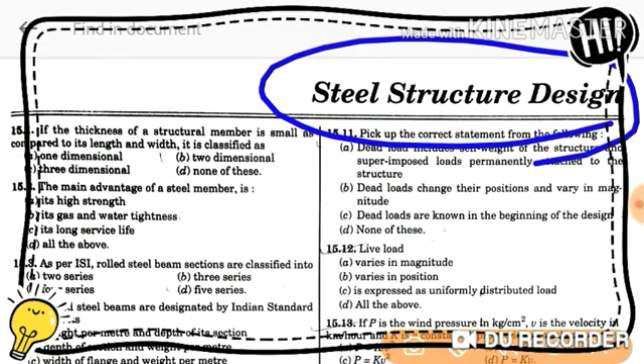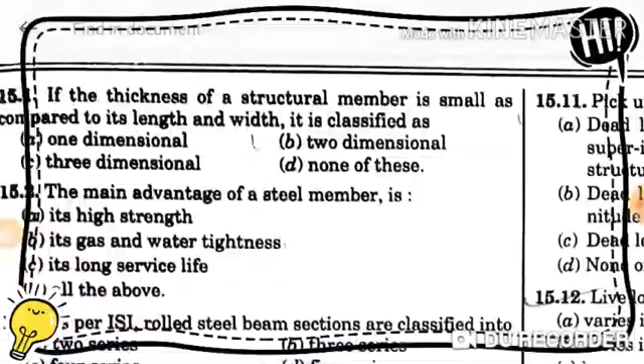First question: If the thickness of a structural member is small as compared to its length and width, it is classified as option A 1 dimensional, option B 2 dimensional, option C 3 dimensional, option D none of these. Option B is the right answer, 2 dimensional.

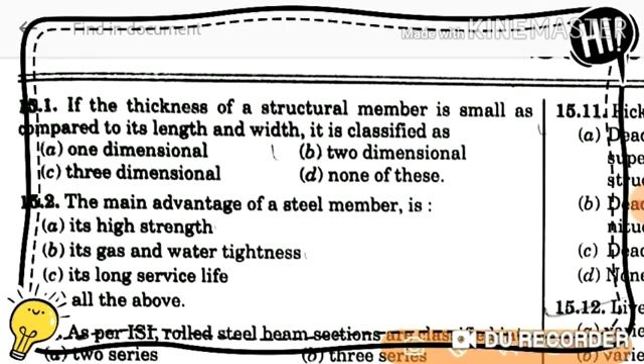Next question: The main advantage of a steel member is option A its high strength, option B its gas and water tightness, option C its long service life, option D all of the above. So D will be the right option.

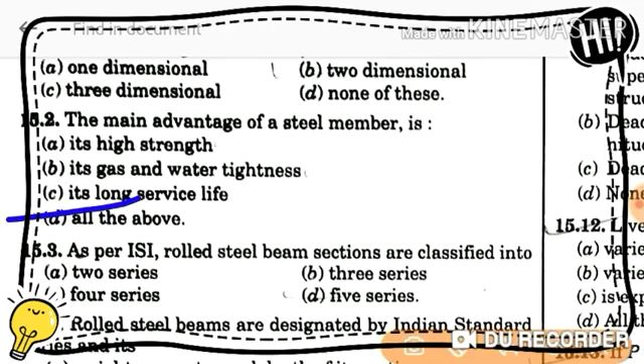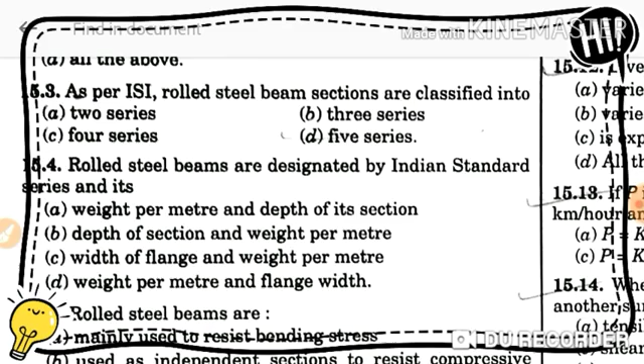Next question: As per ISI, rolled steel beam sections are classified into option A 2 series, option B 3 series, option C 4 series, option D 5 series. So option D will be the right option, 5 series.

Next question: Rolled steel beams are designated by Indian Standard Series as option A weight per meter and depth of section, option B depth of section and weight per meter, option C width of flange and weight per meter, option D weight per meter and flange width. So option B will be the right option, depth of section and weight per meter.

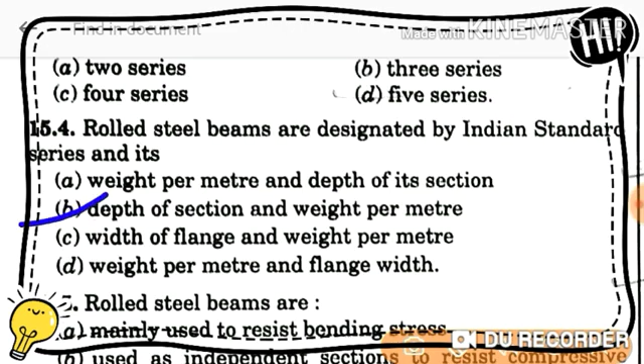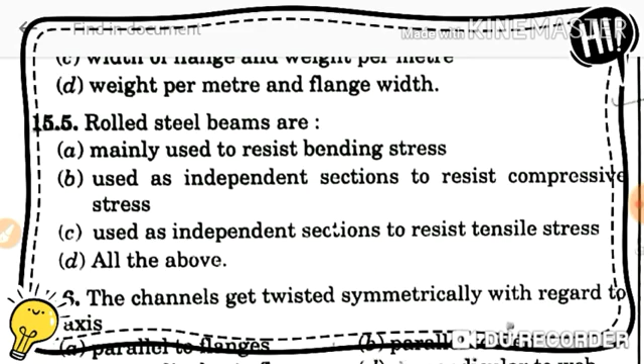Next question: Rolled steel beams are option A mainly used to resist bending stress, option B used as independent section to resist compressive stress, option C used as independent section to resist tensile stress, option D all of the above. So D will be the right option, all of the above.

Next question: The channel gets twisted symmetrically with regard to its axis - option A parallel to flange, option B parallel to web, option C perpendicular to flange, option D perpendicular to web. So option B will be the right option, parallel to web.

Next question: Rolled steel T sections are used as option A columns, option B with flat strips to connect plates in a steel rectangular tank, option C as built up section to resist axial tension, option D none of these. So B will be the right option, with flat strip to connect plate in a steel rectangular tank.

Next question: Rolled steel angle sections are classified as option A equal angles, option B unequal angles, option C bulb angles, option D all of the above. So D will be the right option, all of the above.

Next question: Bulb angles are used for option A column building, option B base building, option C ship building, option D water tank building. So C will be the right option, ship building.

Next question: With percentage increase of carbon in steel, it decreases its option A strength, option B hardness, option C brittleness, option D ductility. So D will be the right option, ductility - it decreases.

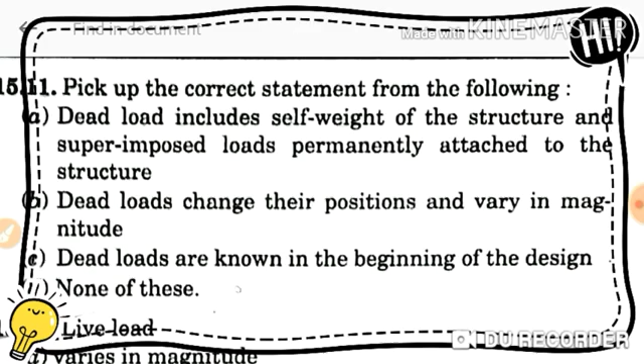Next question: Pick up the correct statement from the following. Option A dead load includes self weight of the structures and superimposed loads permanently attached to the structure. Option B dead load changes their position and varies in magnitude. Option C dead loads are known in the beginning of the design. Option D none of these. So which one is correct? Option A will be the right option - dead load includes self weight of the structures and superimposed loads permanently attached to the structure.

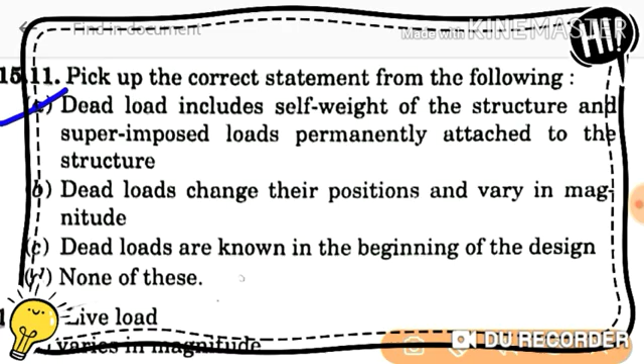Next question: Live load varies in magnitude - option B varies in position, option C it is expressed as uniformly distributed load, option D all of the above. So D will be the right option, all of the above.

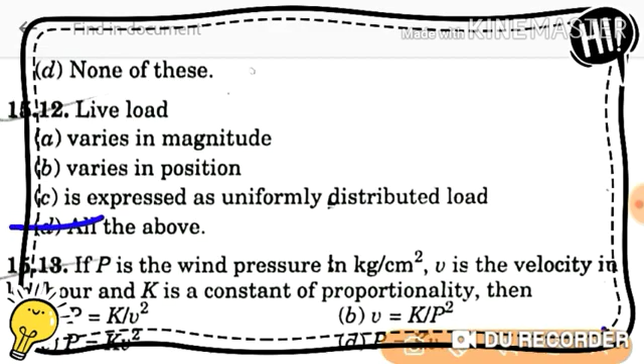Next question: If P is the wind pressure in kg per centimeter square and v is the velocity in kilometer per hour and k is a constant of proportionality, then option A p is equal to k by v square, option B v is equal to k by p square, option C p is equal to k into v square, option D p is equal to k into v.

So C will be the right option, p is equal to k into v square.

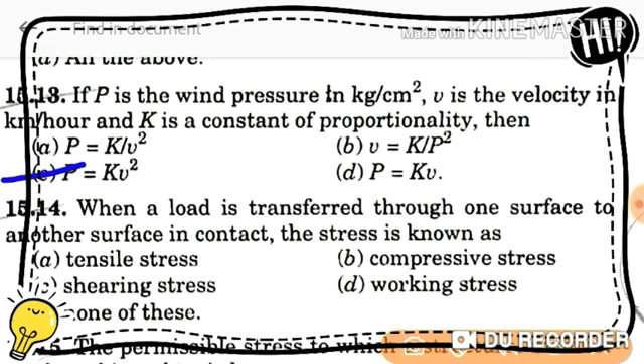Next question. When a load is transferred through one surface to another surface in contact, the stress is known as: A tensile stress, B compressive stress, C shearing stress, D working stress, E none of these. The right answer is shearing stress.

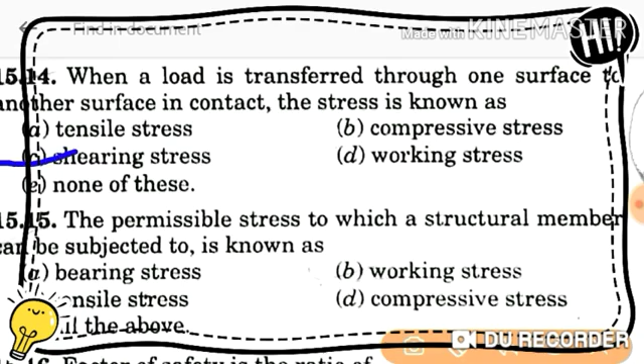Next question. The permissible stress to which a structural member can be subjected to is known as: A bearing stress, B working stress, C tensile stress, D compressive stress. The answer is working stress, option B.

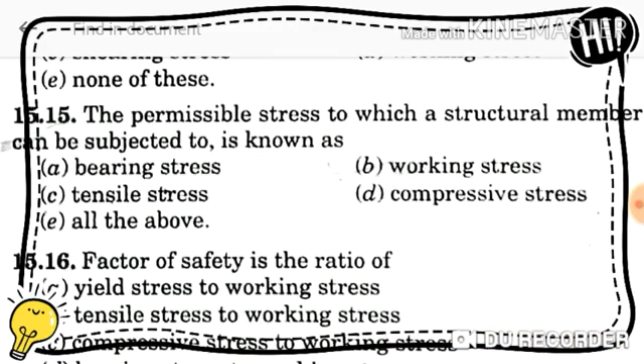Next question. Factor of safety is the ratio of: A yield stress to working stress, B tensile stress to working stress, C compressive stress to working stress, D bearing stress to working stress, E bearing stress to yield stress. A will be the right option, yield stress to working stress.

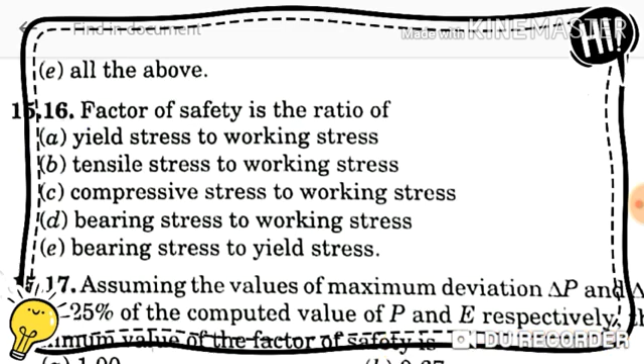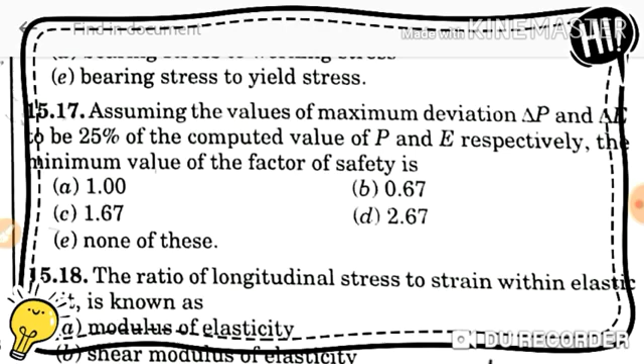Next question. Assuming the value of maximum deviation del P and del E to be 25% of the computed value of P and E respectively, the minimum value of the factor of safety is: A 1, B 0.67, C 1.67, D 2.67, E none of these. C will be the right option.

Next question. The ratio of longitudinal stress to strain within elastic limit is known as: A modulus of elasticity, B shear modulus of elasticity, C bulk modulus of elasticity, D tangent modulus of elasticity. A will be the right option, modulus of elasticity.

Next question. The ratio of shearing stress to shearing strain within elastic limit is known as: A modulus of elasticity, B shear modulus of elasticity, C bulk modulus of elasticity, D tangent modulus of elasticity, E all of the above. It's asking about the ratio of shearing stress to shearing strain. The answer is B, shear modulus of elasticity.

Next question. The ratio of hydrostatic stress to the volumetric strain within the elastic range is called: A modulus of elasticity, B shear modulus of elasticity, C bulk modulus of elasticity, D tangent modulus of elasticity, E all of the above. C will be the right option, bulk modulus of elasticity.

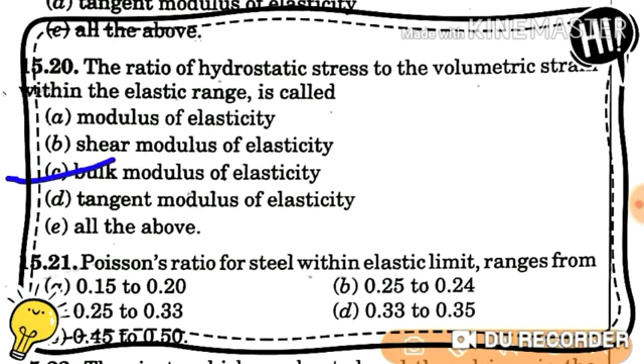Next question. Poisson's ratio for steel within elastic limit ranges from: A 0.15 to 0.20, B 0.25 to 0.24, C 0.25 to 0.33, D 0.33 to 0.35, E 0.45 to 0.50. C will be the right option, 0.25 to 0.33.

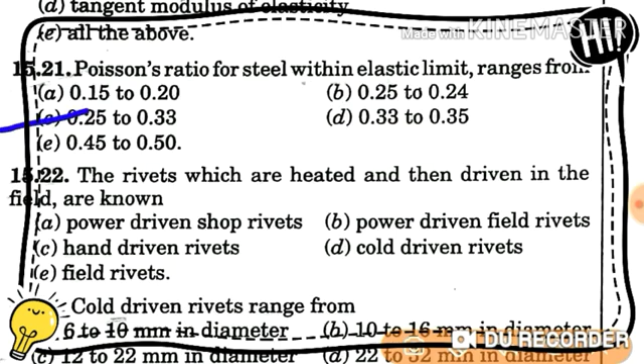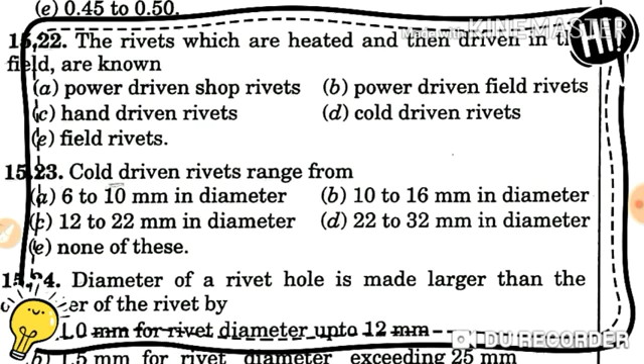Next question. The rivets which are heated and then driven in the field are known: A power driven shop rivets, B power driven field rivets, C hand driven rivets, D cold driven rivet, E field rivets. B will be the right option, power driven field rivets.

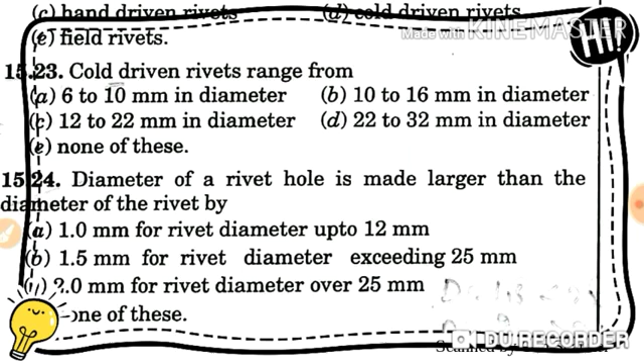Next question. Cold driven rivets range from: A 6 to 10 mm in diameter, B 10 to 16 mm in diameter, C 12 to 22 mm in diameter, D 22 to 32 mm in diameter, E none of these. C will be the right option.

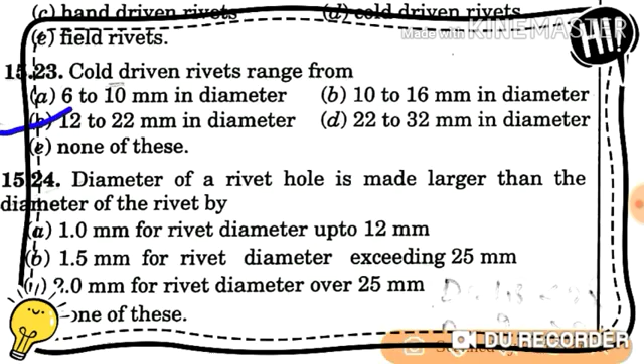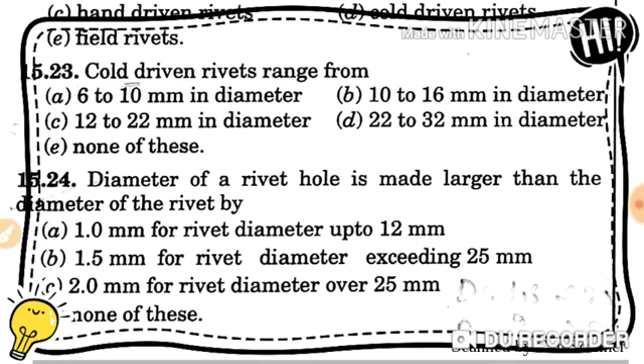Next question. Diameter of a rivet hole is made larger than the diameter of the rivet by: A 1.0 mm for rivet diameter up to 12 mm, B 1.5 mm for rivet diameter exceeding 25 mm, C 2.0 mm for rivet diameter over 25 mm, D none of this. The diameter of the rivet hole is made larger than the diameter of the rivet by 2 mm for rivet diameter over 25 mm. C will be the right option.

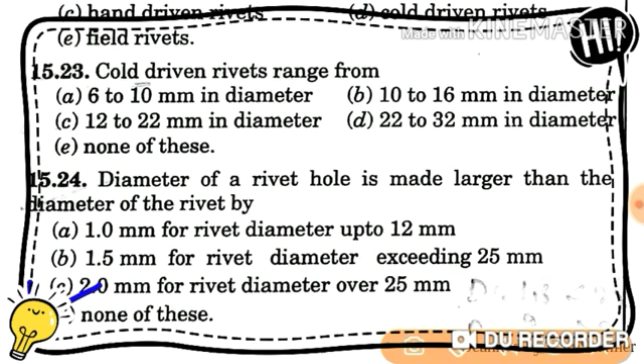अगर डायमीटर 25 mm से लार्जर होगा तो वहाँ पे जो होल है वो 2 mm लार्जर होगा, अगर 25 mm से लेस होगा तो 1.5 mm लार्जर होगा। सो सी विल बी द राइट ऑप्शन।

दोस्तों, यह इस वीडियो का लास्ट क्वेश्चन है, नंबर 25। द ग्रॉस डायमीटर ऑफ ए रिवेट इज द डायमीटर ऑफ: ऑप्शन ए कोल्ड रिवेट बिफोर ड्राइविंग, ऑप्शन बी रिवेट आफ्टर ड्राइविंग, ऑप्शन सी रिवेट होल, ऑप्शन डी नन ऑफ दिस। सो बी विल बी द राइट ऑप्शन।